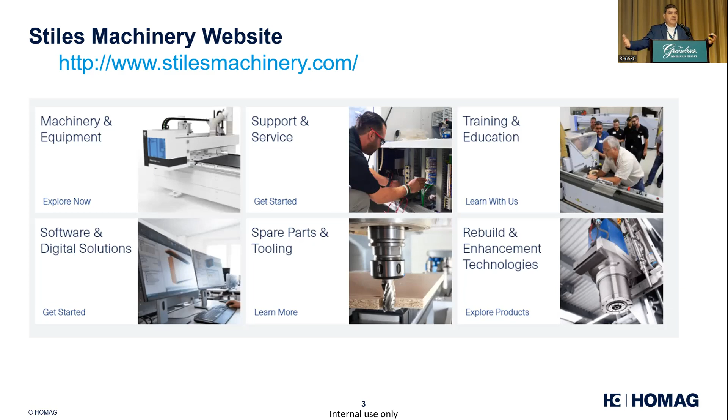As you saw, we have to have several different types of machinery to make an entire factory. We work with Microtec for lumber scanning, they've been around since 1980. And of course there's planers, sanders, CNC machines, and a HEIAN CNC machine down in the lower right that I'm introducing to the mass timber market, with very interesting features. But that's our mass timber partners.

If we're going to do an entire factory for you, we have to partner so that all the machinery in that factory is accommodated. So what I want to talk about is, what is mass timber? It's kind of a little different spin.

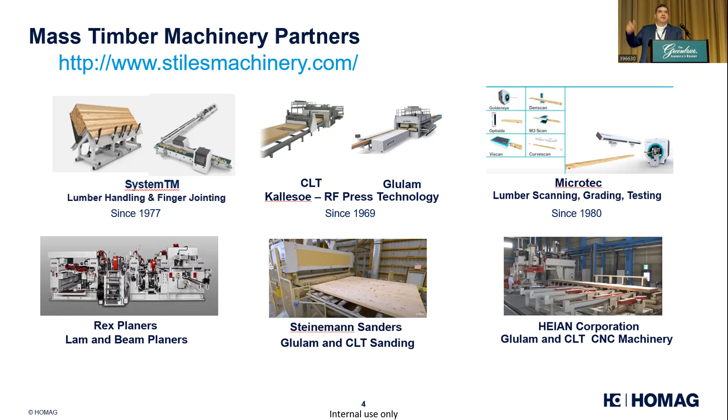So mass timber is a subcategory of heavy timber construction. You probably can imagine the stories of old barn raisings, big timbers, mortise and tenon, old world type joinery. There's actually a standard called heavy timber construction. What defines that type of construction as heavy timber is beams have to be minimum approximately 6x10s, and columns have to be minimum approximately 6x8.

Floor decks not less than 3 or 4 inches thick, depending on what type you use, and roof decks not less than 2 or 3 inches thick. So by definition that is heavy timber construction. For example, a residential home made out of 2x4s and 3/4 inch plywood, that is light frame construction.

Because of these large dimension structural members, the heavy timber, large dimension members, that means they get assigned a fire rating for the building codes. In residential, when you have 2x4s and plywood, you have to have that layer of drywall in there, or other fire resistant features of your light frame. But in heavy timber, just the mass of the timber itself gives it a fire rating. So that is heavy timber construction.

You're probably familiar with some of the other terms like timber framing, heavy timber framing—those are the old barn raising guys—and post and beam framing. Those are also subcategories under heavy timber construction. So the main question is, what is mass timber?

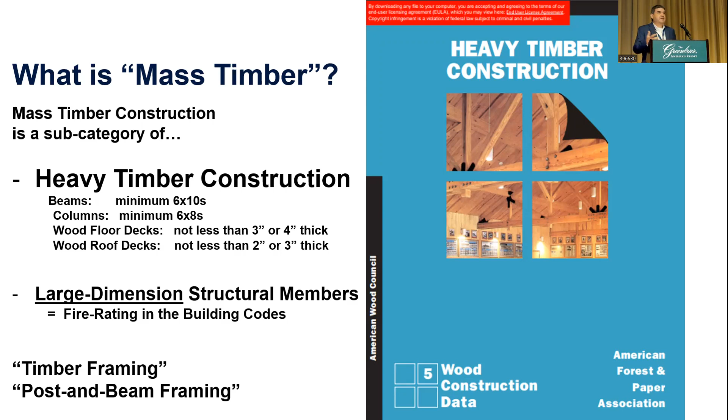Mass timber, by definition, is when you utilize these engineered wood products. There are several products considered engineered or mass timber products, but the two we're going to focus on are glue laminated timber, glue lam or GLT as it's being called nowadays, which are laminated into beams and columns, and cross laminated timber, which we've been talking about here, which are panels for floor, roof, and wall panels.

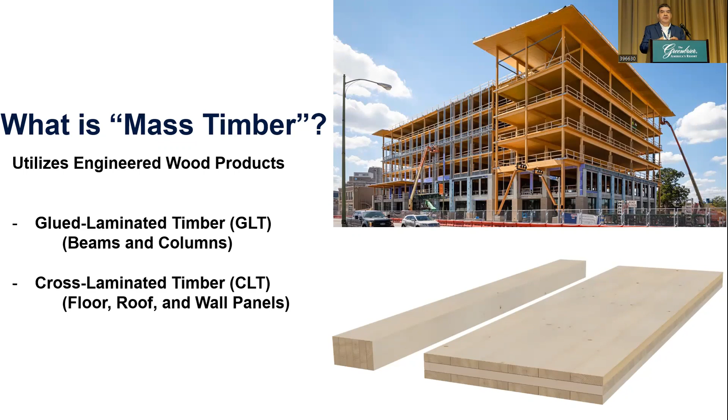You can see a 5-6 story building here. This is actually in San Antonio where I live, and it was the first multi-story mass timber building there in San Antonio. As you can see, the elements are glue lam for the beams and columns, and cross laminated timber for the panels. Here's the map you've seen before just earlier.

Now you're looking at it through a different peephole, same information, different peephole. So is the popularity growing? Jeremy just established that—yes it is. This is the projects on record.

There's 1,860 projects, and this is fresh, as of June 2023. All these dots represent that construction has started, construction has completed, or it's in design. If you look at the two arrows on the bottom right there—construction started or built—the majority of those projects involve CLT. That shows you the popularity, that CLT is really dominating this movement.

In design, I want to point out, on my slide here 444 are construction started—that's in the last 20 years approximately. And in design there is, what is it, 580 something, I can't see that far. But the point is, there's more in design right now, as of June 2023, than the total that has been constructed in the last 20 years.

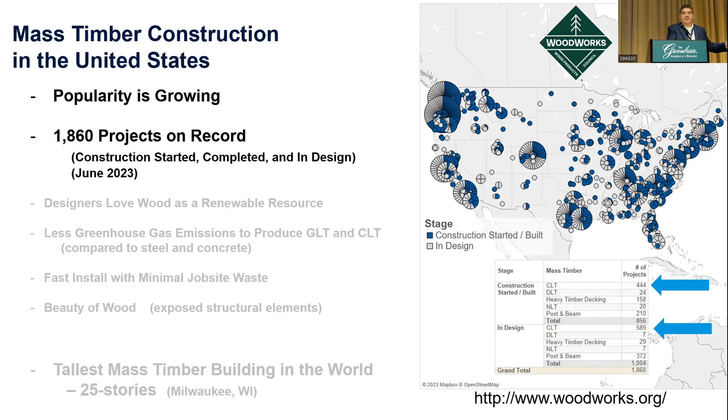Jeremy showed you the next one, the animation of all these projects that are developing. So again, here's what's been constructed.

Under that other view, the arrow points to when PRG 320 was adopted. Notice the initial first decade or so, folks were doing full engineering of buildings and getting them approved at the local level. You can see pretty much a linear line, kind of trying to gain momentum. But once that PRG 320 standard was adopted, you can see it's exponential.

And again, this is constructed. So that total there, that's 856 at the top of that exponential curve. Right now, as of June 2023, there's more projects than there were ever constructed in the past 20 years. So the point is the popularity is there, and we don't see it slowing down right now.

The way to even confirm that for the next decade is that you look at Europe, and they're still on an upward rise. Europe is at least a decade ahead of us in technology and fabrication of these projects. So if we look to Europe as a 10-year foresee of the future, we're not seeing any slowdown. And of course, Jeremy circled the Appalachian area, lots of opportunity.

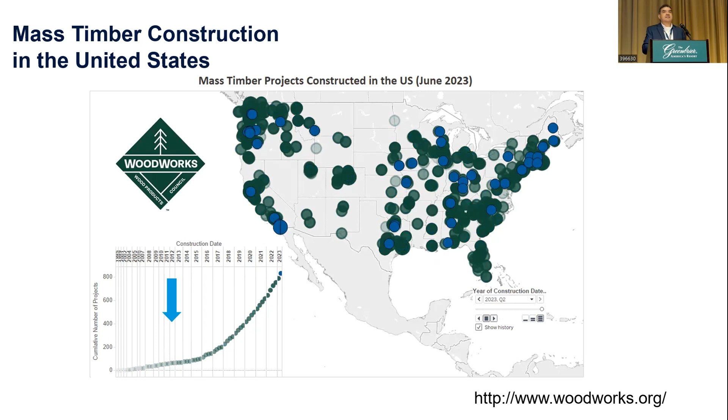Same slide, under the mass timber construction. So why is this so popular? Designers, and developers, love wood because it's a renewable resource. Every developer wants to put that LEED Platinum stamp on the front door of their building. So wood is in this green movement. There's less greenhouse gas emissions to produce glulam and CLT versus steel and concrete.

So how do we affect that map that we just saw? How do we affect that popularity to say, I want to promote hardwoods? It boils down to convincing the designers, the architects and engineers, and the developers to say, not only do I want a mass timber building, but I want to make it out of hardwood.

And the way to approach those folks is that architects are always open to listen to new products. It's called AIA presentations, and I've done that for many years, where I go and promote glulam and mass timber. By the way, my previous employer was one of the glulam manufacturers, so I was project managing projects that would involve the fabrication, delivery, and install of these projects. So you've got to hit the designers and the developers and convince them to call for hardwood glulam or hardwood CLT.

The other reason they love it is, like the guys in the upper right there, fast install and minimal job site waste. You're not going to have a pile of rubble. There's no sawing that goes on at these job sites. Everything comes pre-finished, pre-machined, and ready to fit. Steel connections go together, so everything comes ready to assemble. So minimal job site waste, and of course the beauty of wood.

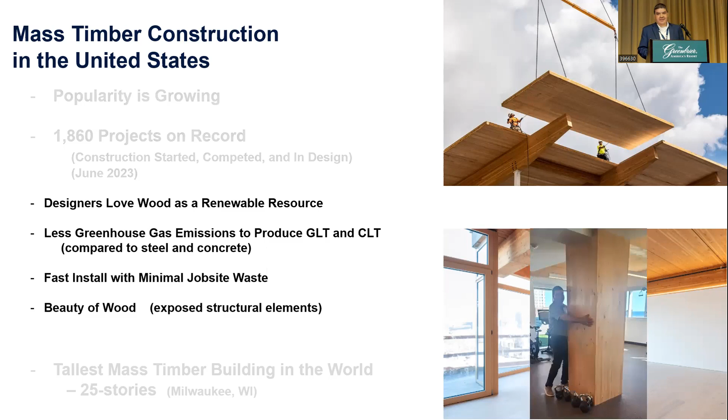So this column here was in the tallest mass timber building in the world. It's actually in Milwaukee, Wisconsin, 25 stories, and that column I was hugging there, that's the bottom floor of that building, the bottom timber floor. I asked the developer of this building what led him to use European CLT and European glulam for this, and his one and only answer was that only those two companies could supply a project of this size. So production was key in choosing the supplier of that project.

When I sit down with folks that are interested in setting up a factory, I ask them, and I show them this picture, what market are you trying to supply? Are you trying to supply projects of this size? Are you trying to supply projects of the 4 to 6 story, like the other picture I showed you? Are you looking to do just 1-story banks or large glulam natatoriums? We've got to get a definition of what is the objective of that factory before we talk about a factory.

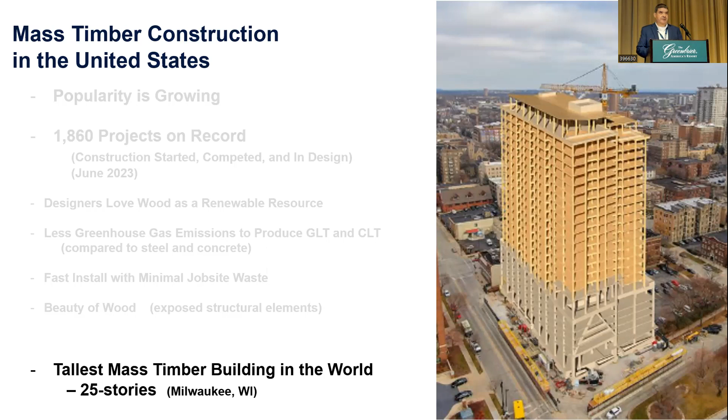So that's like at the top of the heap there, supplying volumes of that level. So let's talk a little bit about glulam and CLT manufacturing. And I found these two photos on the internet.

I think I know that the top glulam example was adhesive manufacturers, because notice that they really are highlighting the adhesives.

But in general, concept-wise, glulam - you're taking lumber, and if you're going to make beams larger than the lumber you've got, then you're finger joining them end to end to whatever length you need. Then you take those long length laminations and glue them up face to face into a beam, like what you see there. Plain concept.

Cross-laminated timber, same concept. You're still taking lumber, finger joining it end to end, but now you're laminating it 90 degrees to each other. So there's longitudinal and transverse laminations, kind of like plywood, except plywood is veneer. Here you're just laminating lumber.

A point I'll bring up later - notice that this lower CLT graphic, which I borrowed from the Sterling website, shows nice S4S same width lumber. Of course, everyone here processes random width lumber for hardwoods, right? So you see this as an opportunity, but also a challenge, is that row going across the width there - you can actually utilize random width.

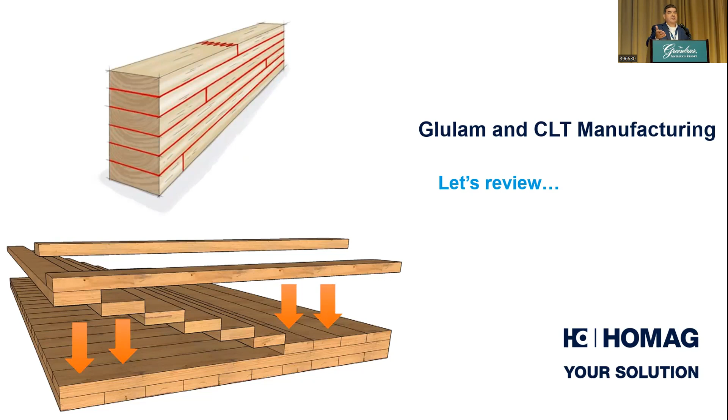There's nothing in the standards that prevents you from doing that, and you can increase your yields. You don't have to take your random width lumber and rip it to some even width and lose yield immediately. So there's actually opportunities to use random width in this product, but there's challenges to processing that - we'll talk about that.

So glulam, let's talk about glulam. And here's where I say it's part of the history. We've seen it in history, and we're repeating history. We're making history right now. So let's talk about glulam.

The main point about all this mass timber, and we're here with hardwoods, is we're actually targeting to make an engineered wood product. We're not just machining lumber to a shape - we're making an engineered wood product, and it's going to be used in a structural application, like that 25-story building we just showed. For that reason, because you're making a structural product, you have to follow a product standard. For glulam, it's the ANSI A190.1.

That's like your quality control standard - if you're going to make a structural product, you better make sure you're meeting the requirements for lumber, the grades, laminations, how they're all fabricated, the finger joining, for example. What adhesives are you going to use? They better meet all the quality control testing, and then the bond quality. So in that picture, you're going to have face bonds, edge bonds, end joints, the finger joints.

So all of that is quality control, and you're going to have to develop a quality control manual, and you're going to be inspected. There's daily quality control that you do in-house, and you're going to have inspectors coming in to make sure that you're operating not just at a required level, but also consistently throughout the year.

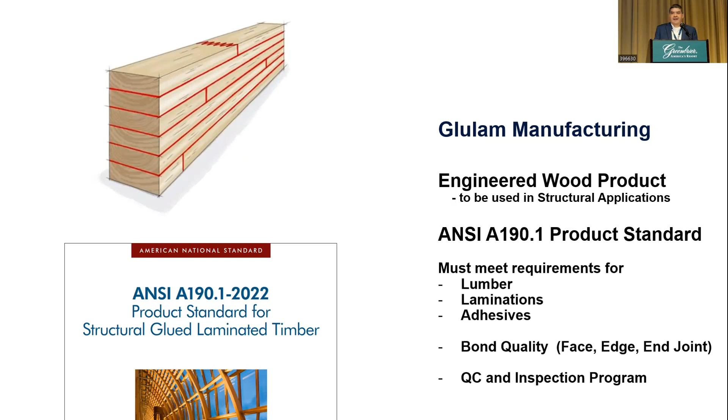That brings up another slide I share when folks come to talk to me - if you're going to become a certified manufacturer of glulam or CLT, you're going to need to meet with these certification agencies. The one I highlight is APA, the Engineered Wood Association.

I actually work there. APA is going to put you through a series of questions. What wood species do you plan to process? Hardwoods, right? What layups do you plan to produce? Well, we have to talk about what's in the standard. Who will be your lumber suppliers?

In this case, you all are the lumber suppliers. So APA wants to make sure that you're going to have a consistent supply. They don't want you always struggling to find a resource, and then your product isn't consistent. Who will be your internal lumber graders?

And here again, this is a structural product, so we're not talking about your NHLA grader - we're talking about structural grades. And then what adhesives will you use? Well, that depends on what type of process you're going to be pressing these or finger joining, and different adhesives have different performances. That's important for hardwoods here again, and many more questions.

So you see these factory layouts, and you also have to have a whole other QC lab in that factory, because you're going to have to do daily sampling of finger joints. You've got to test them in tension in-house. You're going to have kilns for processing your shear blocks to test your adhesives for strength and for durability.

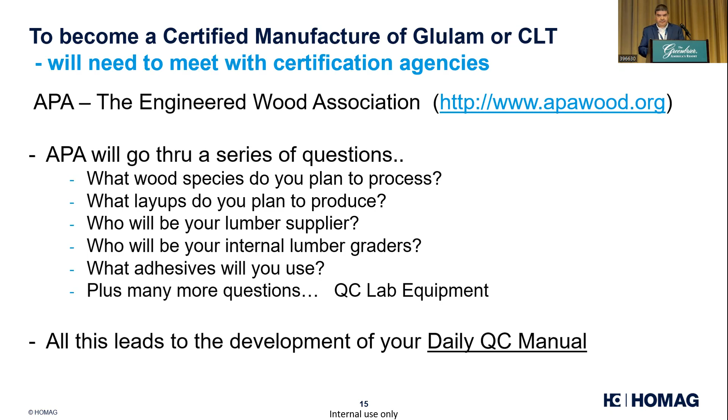I created this. So when I first started with Stiles, I said, let me make a map of all the certified manufacturers, and green was me. That's why Jeremy, we never met, because I was green for this whole first year, but I'm going to start visiting all the reds as well.

So these are all the certified manufacturers, certified meaning for structural. You showed a slide from the mass timber manual that got put out recently, and there were 18 manufacturers. I think 6 or 7 of those are like Sterling Structures - they have 2 plants, Texas CLT. They're producing crane mats. Structure Craft was on that list, they produce dowel laminated timber, so they're not on here.

This is Glulam and CLT. For the CLT group, I think there's only 11 manufacturers that are making CLT. Others are making CLT but aren't certified for commercial, like the building that you showed - they're not even certified, just making crane mats, for example. So this is the map I produced just to give you an idea.

And we've talked about regions, right? Appalachia is right there. If you're going to want to convince one of these manufacturers to receive your material, they got to go through those series of questions, even though they're already certified. If they want to introduce a new species, they're going to have to go through all that series of questions and certification. So it's a hurdle to bring a hardwood in, even to an existing plant.

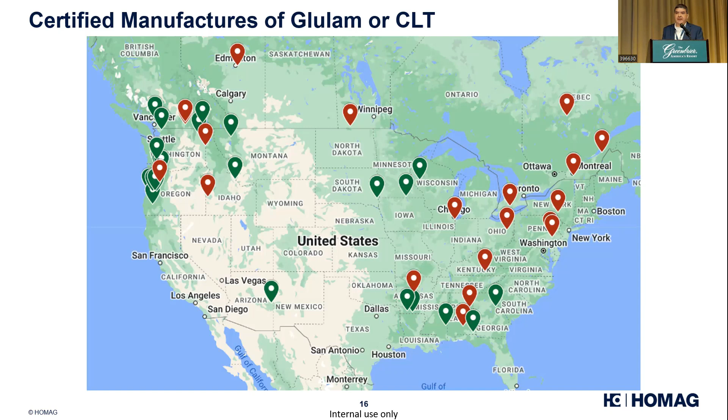Okay, so you have that QC standard - that's just saying how do you operate your factory. But then you need to know, well, what am I going to lay up?

And so if you have like a 20 lam beam, that's the bottom 1 lam. If you have a 21 lam beam, 5% is more, so you're going to have to have 2 tension lams on a 21 lam beam and higher. But anyway, it's the recipe, and the way I like to say it is, if you follow the recipe as a certified factory, you're then going to be able to assign a design value.

So this 24F V3 is called a 24F because it's got a design bending strength of 2,400 PSI and 1.8 million PSI of design bending stiffness. Those 2 numbers and more design values are what the engineers jump in and use so that they can design beams for their large building design, so that they can size those glue lams. So follow the recipe at the factory, you produce a product, and there's design values associated with it. That's how this is all set up in mass timber.

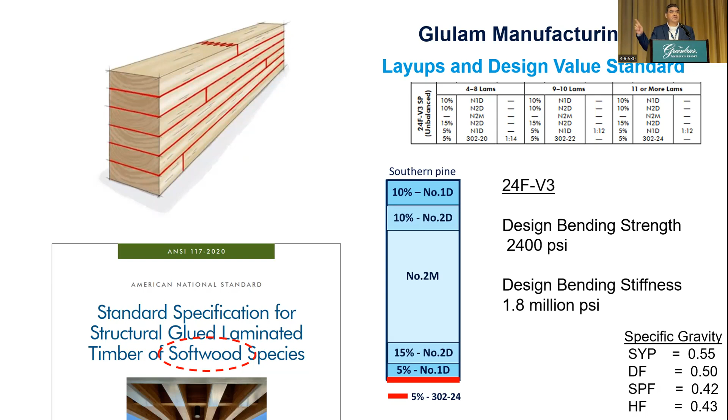0.55 to 0.43. Oh, and by the way, that 25-story building that I showed you that was made with European spruce has a specific gravity of 0.37. So that 17 stories of mass timber was made with a wood in Europe that has lower specific gravity than what we have here in the US. I think it's 0.37, so you can write that down.

So hardwoods, what about hardwood glulam? Here's where we start getting into some history. Back before this 1996 version, by the American Institute of Timber Construction, there are hardwood glulam layups in the standards. It's not by APA, it's by AITC.

The way they set it up is they call it by groups, group A, B, C, D, and there's a lot of species within each group. So group A, and I pick on red oak for a reason, I'll show you why. Red oak is a 0.62 specific gravity, so much higher than southern pine.

Other species in group A include ash and hickory. Group B has red maple, I'm picking on that one for a reason, 0.54, textbook specific gravity. That's right at about the same as southern pine, a little higher than Douglas fir. And then yellow poplar.

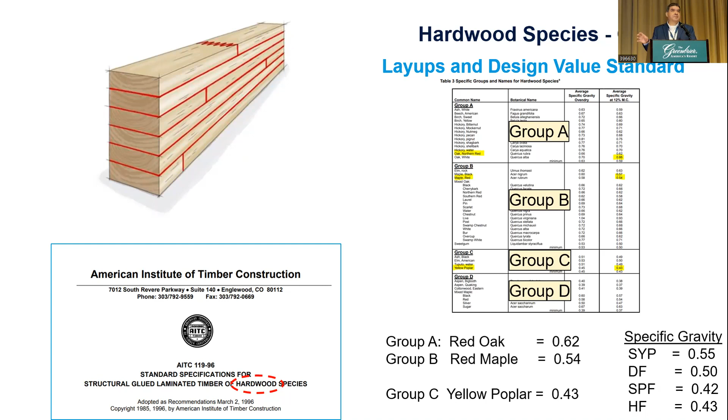Everything we've been talking about is yellow poplar here. That's a group C species in hardwoods, and it's a 0.43, again a textbook value, about the same ballpark as spruce pine fir and hem fir. We're going to latch onto that information - group C yellow poplar is at about the same level as spruce pine fir and hem fir. There's a lot of CLT being produced today made out of hem fir and spruce pine fir.

So there's a good starting point there. The strongest visually graded yellow poplar in that 1996 standard - which is actually still today's standard, but that old - is a 14F V1. Remember southern pine was 24F. This is the strongest available for visual grading: 25% select structural on the bottom, 25% number one, and number two in the middle, and it still needs that even higher grade tension lam. Even though you used all this great high quality and expensive material, you can only assign it a 14F and a 1.3 million. That southern pine was 2,400 and 1.8.

And again, these are structural joist and plank grades. So do you think this is going to fly? You're using up expensive FAS grade material to make a structural product that can't even compete with southern pine. So that's how the standard was.

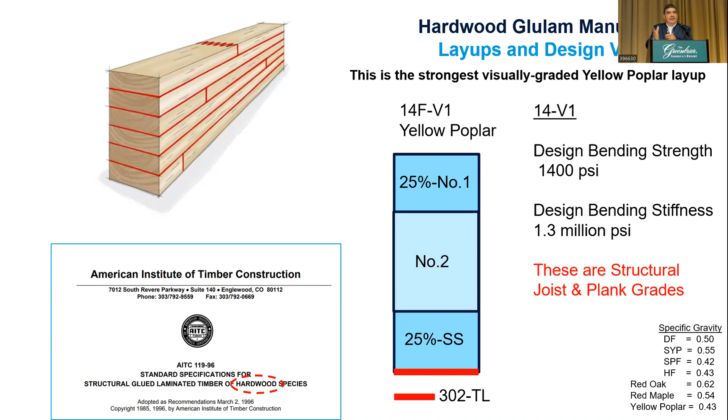Back in the mid-90s - by the way, I also worked at the Forest Service, and by the way, I am on the PRG 320 committee, Tom, so I was on that email list that just came out while we were talking. In the 90s, when I worked with the Forest Service, we said this hardwood glulam standard is very conservative. Let's make up some layups. These are some of my reports here: efficient utilization of red maple, yellow poplar glulam performance.

We said let's go make hardwood glulam layups made from mechanically graded lumber, so you don't have to use select structural, you don't have to use number one. Let's take material, run it through a mechanical test program, come up with some grades, and see where we are. We actually had a target. I picked red oak, red maple, and yellow poplar because that's what we studied. In a different life, I was one of the researchers doing that - kind of what's happening today, right?

So in the mid-90s, I'm going to refer back to that picture on the left - that picture is worth 1,000 words. One of the things we wanted to do is, it doesn't make sense to cut up your FAS material and propose a glulam made from high grade, because that's higher valued in another industry, in hardwood and furniture making. The objective of that study was to say, let's use that center cant after all the high grade material has been processed out, and see if we can make an E-rated grade.

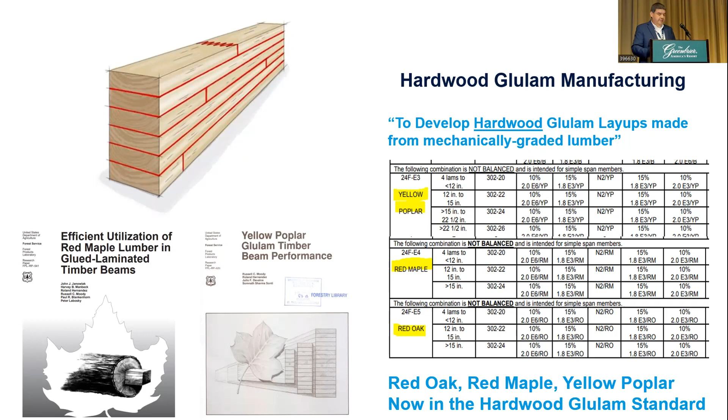So that picture is worth 1,000 words. The feather for a researcher's cap was that those three line items are now in the standard to this day - 1996. Yellow poplar, red maple, red oak, group A, B, C. And this is what it looks like.

Again, the other feather for the cap is that we came up with a layup that targets 2,400 PSI and 1.8, just like a southern pine. If you look at percentage increases, that's like 72% stronger than what was available before with visually graded, and 38% stronger than that 1.3 layup that was all visually graded.

So again, it's in the standards. But are you seeing that, this is from 1996, in use today? I think back then there was more focus on technical feasibility—a lot of the research going on is always about technical feasibility. And you all here in the audience are interested in the economic feasibility, right? How do you use your material? So that's still a hurdle that needs to be overcome.

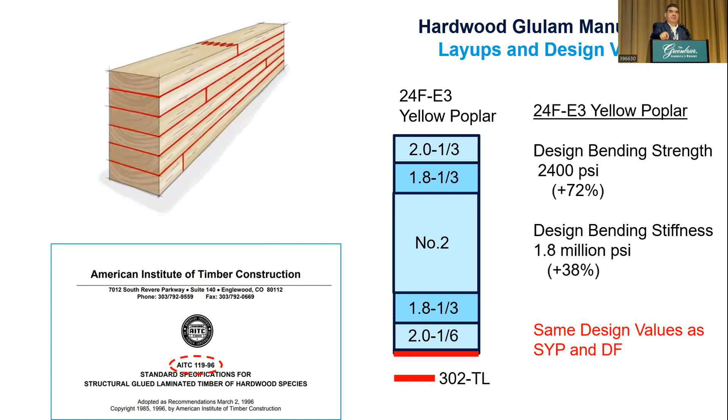We don't want to repeat history and see this 20, actually 30 years from now. In 30 years we don't want to see CLT in the standards, but nobody's using it. So we've got to do something to not repeat history, and say that we're going to use hardwoods in CLT. I'll show you how there are advantages for CLT as opposed to glulam.

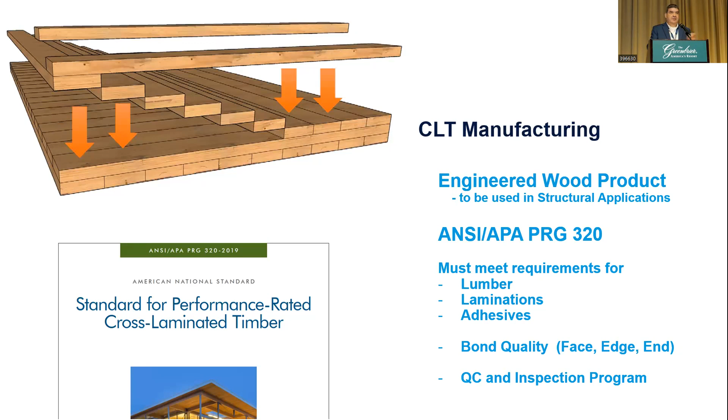I'm not going to go into that long spiel like I did for glulam covering history, but CLT follows exactly the same parallel. It's an engineered wood product used in a structural application, and everything's the same as far as requirements for quality control and bond quality. The inspection program has to be certified by APA, but it's now the ANSI APA PRG 320 standard—that's the standard for CLT, like the other one was for glulam.

In that standard there's an Annex A—that's like the recipe page, it's not a different standard, it's a recipe page. If you look at, I think it's the V2 layup, that's number one spruce pine fir on the longitudinal layers and number three spruce pine fir on the transverse. That's the recipe. If you use number one and number two spruce pine fir, you're assigned a design value.

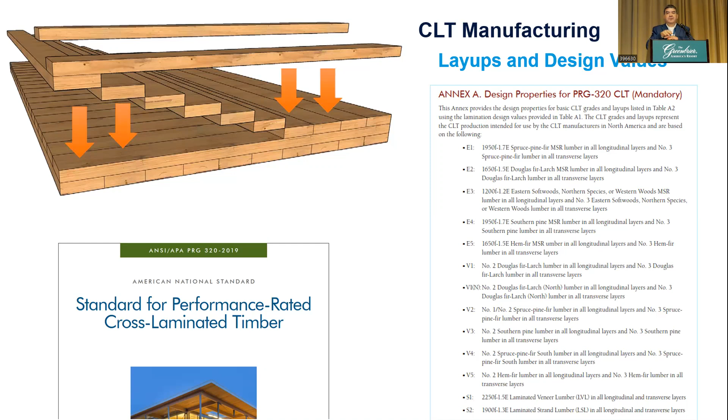As of right now, there was literally an email that came through during the first talk today: the PRG 320 is going to be adopted. There's still voting to go, but that layup is going to be called VH1—H is for hardwoods, and it's yellow poplar. The other hardwoods aren't in there yet, but yellow poplar will likely be in there after the voting. I think the target date is late 2023, though the printed version might say 2024, but that's happening right now.

Does that sound familiar? All this research going on to get hardwoods in the standard for CLT—27 years ago we were doing exactly the same thing to get hardwood glulam into the standard. So let's learn a little bit from history.

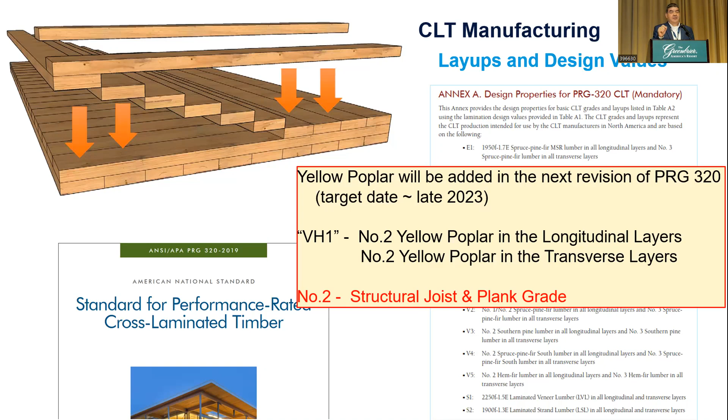The VH1 layup is actually kind of nice because it's easy: number two grade every which way—number two longitudinal, number two transverse. And again, this is number two structural joist and plank, not the common appearance grade. So there's going to need to be some regrading going on here, and we're going to talk about that.

I pause here with this picture—imagine you're producing random width lumber, and everyone is. To make that glulam on top, you're going to need to do some width sorting, and if you have a target glulam width, you'll have yield loss because you need to trim some boards. You'll have to plane that final beam, and that yield loss already puts you at a disadvantage just to make it—and we haven't even talked about pricing yet.

In CLT, all those nice equal-width boards going across can actually be random width. So you will need to S4S them, but you can utilize multiple different widths across that layer and across the length to fill up that volume. I think there's a small advantage here to try to overcome some of that cost difference by using the full width of random width lumber—just a tidbit I wanted to pause on.

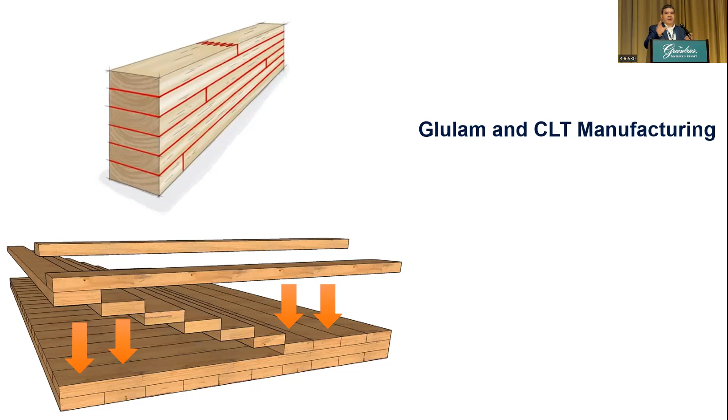Machinery-wise, we're actually in discussions about designing a machine for that, so don't ask me today, ask me later. So let's go through how it's made, and I really want to relate it to what you need to know as it relates to hardwoods. Let's make some hardwood CLT.

This is a hypothetical sit-down on how we're going to use yellow poplar to make yellow poplar CLT. The PRG 320 has adopted this new layup called the VH1. That means we need to lay up number two grade yellow poplar—specifically number two grade structural joist and plank.

So you as the suppliers, you want to utilize number two common appearance grade, maybe you can utilize your number three common. That's a question, right? So what does that mean? You're going to need to regrade cost effectively.

I'm not talking about your NHLA grader that is grading your appearance grades. Now we got to get him to rerun everything he just graded and see what falls into number two grade structural.

I want to show you some cost effective ways we'll need to process. We want to process out what is true number two structural out of that material we're supplying, and then maybe we know there's going to be reject that does not make number two structural. How can we upgrade that, and all those reject sections, maybe we can reintroduce it.

That layer that you saw building in the transverse layer of a CLT, there's a lot of leeway in those cross layers to use lower grade or reprocessed materials. So that's where CLT is an advantage, and maybe that's why history shows that the glulam was not easily adopted.

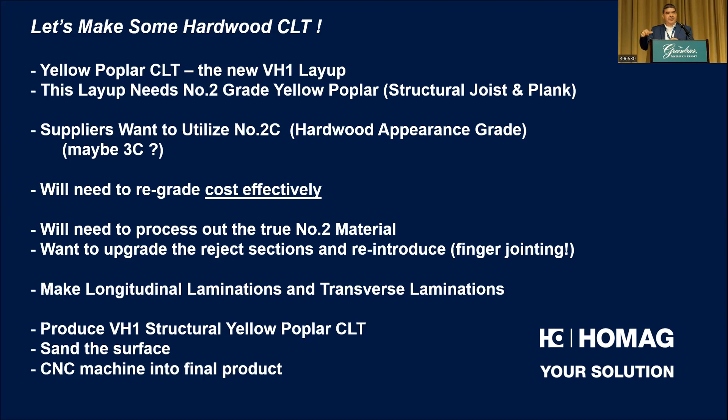So next line is we're going to make longitudinal lams and transverse lams, and then we're going to produce the CLT. You got to press it, then we got to sand it, and we want to get it out to the job site. So we got to do CNC with the final product and get all the details so that it gets installed out in the field.

So let's go through a factory here. We call this a compact factory, and this factory is on the HOMAG website. So we call it a compact CLT factory. I'm going to show on the lower right some of the different features along that whole line. So you've got your lumber infeed, obviously.

System TM produces what they call their OptiFeed series. You can go as simple as a tilt hoist to bring in your material - notice I put a square around the bundles of lumber and a forklift feeding it. Or you can get it even more advanced, with what's called the OptiFeed 6000 VAC. We'll have a video later.

So basically you're pulling off whole rows of lumber and you can feed it into the system at 32 boards a minute. So actually a very high speed line that can just be the infeed.

Next, we use MiCROTEC here to do lumber scanning. Before you run a board through your finger joiner, if you have a warped board that's twisted and crooked and bowed, that's going to just jam up your finger joiner, and then you're spending hundreds of dollars a minute to try to get that unjammed and your production stopped.

So what MiCROTEC does is they have what's called a CurvScan. They map out the curve or the warp on a board, and if there's something out of tolerance, they send the software signal to a crosscut that I'll show you in a bit, and it chops it up. So say that's warped, bad for laminating - let's process it down, get it into a shape and form that we can refinger join, or completely reject it. So that's CurvScan, this whole area I have boxed there.

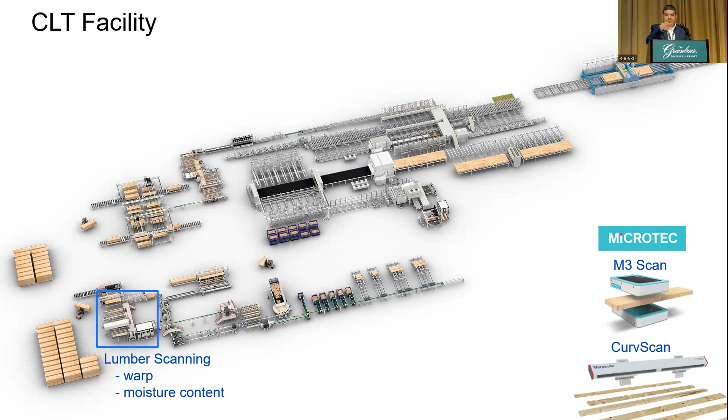Then it gets sent through a GoldenEye - so lumber scanning, X-ray knots. You're X-raying, and imagine your NHLA guy that's grading - I go like this because I know they walk on the boards and walk down the line, they flip the boards, and you know he's looking at knots as well. Well, this machine is looking at knots.

It does it at several hundred feet per minute, and it's not only taking an X-ray of every single knot, but you have a program that runs this. And if your program says I'm just sorting number 3 grade lumber, well guess what - that board is just going to zip right through and nothing's going to happen to it.

But if you want to say I want to sort out FAS - for example, we're still talking appearance - I want to sort out FAS, so every board that has 6 foot minimum, is that still the grade for FAS clears? The program will say okay, if there's a 6 foot board, send the software and send it to the chop saw to cut out every clear out of there, because that has a higher value. But for structural, we just need number 2 for our yellow poplar, CLT grade.

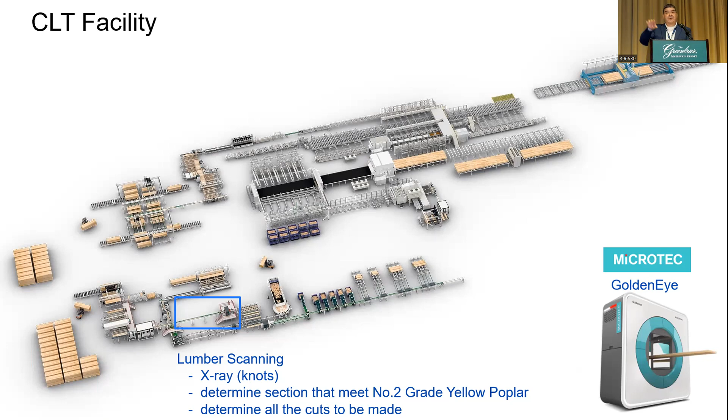So if it meets number 2 at a certain length, chop it and send it to the number 2 grade. If it's reject, let's go do something about that. So that's what this all can do. It's not just the scanning of it, but it's the software that controls every machine down the line.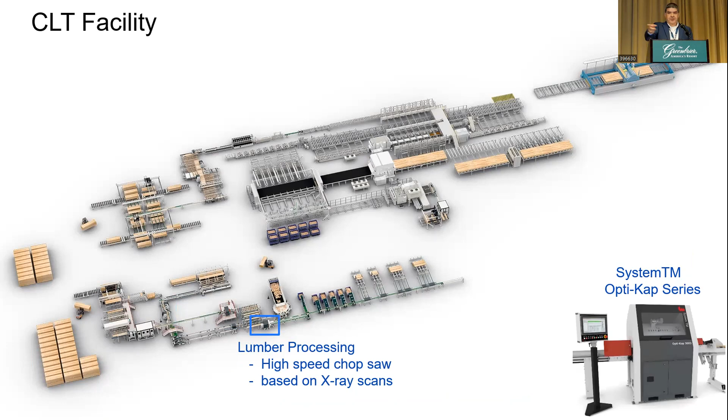All right, so now you got lumber processing. Here's the System TM Opti-Kap series. I had to look it up, but they run at about 400 plus feet per minute. And it's not just, when it runs through, notice all those chops to the right there. So it's chopping at 400 feet a minute, and it's chopping little clears, the full length 6, and all that information it gets from that knot map. It's doing a smart cut and all those different sorts.

So in this case, you see about 9 sorts and maybe a reject run. So that's what this system does: run it through the golden eye, Opti-Kap, chop it, and you've got all your sorts that you're ready to send to higher value furniture hardwood, or send back through the line for the low grade transverse, or move it to the longitudinal grade. So that's key, those 2 last steps there.

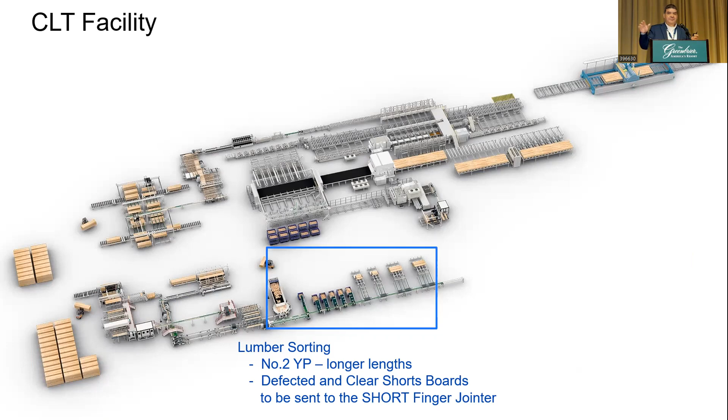So now you have it all processed. Let's take our reject and send it right back down that line, and take it to the short board finger joiner. So suppose there's pieces that were too warped as an 8-footer or 10-footer, we chop it down to clears, and we have what's called the System TM Opti-Joint H-200. So that's a short board finger joiner, and you'll see it in the video.

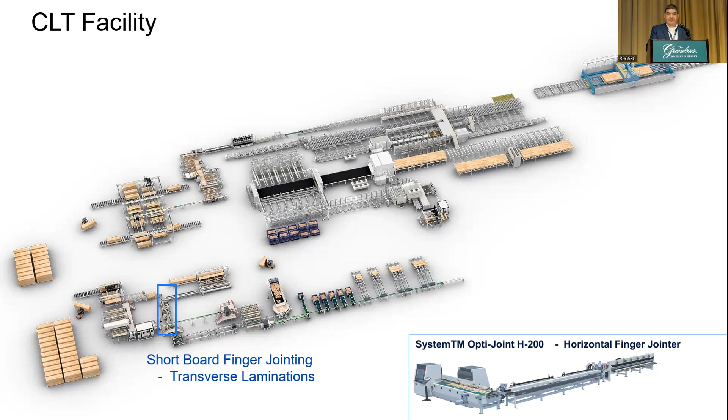So we can't zoom in here, but taking boards that are short, finger join them with a horizontal joint, and that's going to make - what we're doing here is making the 10-foot wide or 12-foot wide CLT transverse lamps. So we're just finger jointing shorts, making only for the transverse. Here's finger jointed boards that had just been finger jointed, made from short boards. They're going to be hidden in that CLT layer.

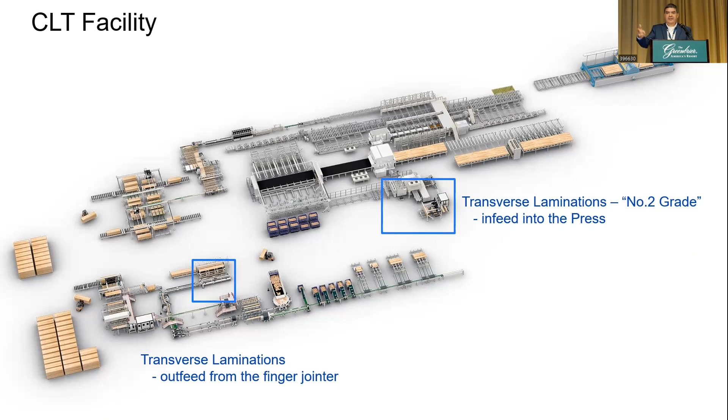That's the outfeed on the left. We're going to take those and take them to the infeed over on the right, and that's going to be the infeed for your CLT. So while that's happening, all those higher grade or long boards that got sorted out, we're going to send them to the long board finger joiner. And so in there, the infeed for that is the Opti-Feed 6000 Vack.

So here we're only doing 1 grade, number 2, but suppose you had multiple grades like that glue lamb I showed you that had 4 different grades. Here you can be picking off from 4 different packs and saying, I got to send 5% number 1 dense, 10% number 2 dense, 50% number 2 medium. And imagine the log jam if you had a human having to do all that. Well, here you got a machine that's just pulling exactly like that recipe.

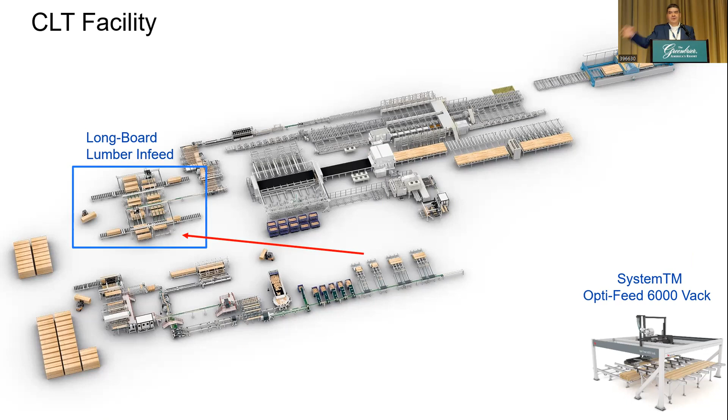So now I'm circling back and using some of the terms you just learned. We're grabbing the recipe and feeding it into the finger joiner. And we're going to have all the material that we need to make up the beam, or in this case, to make up the CLT.

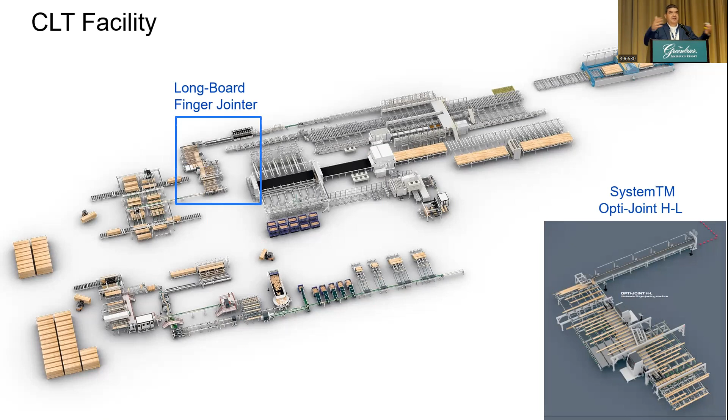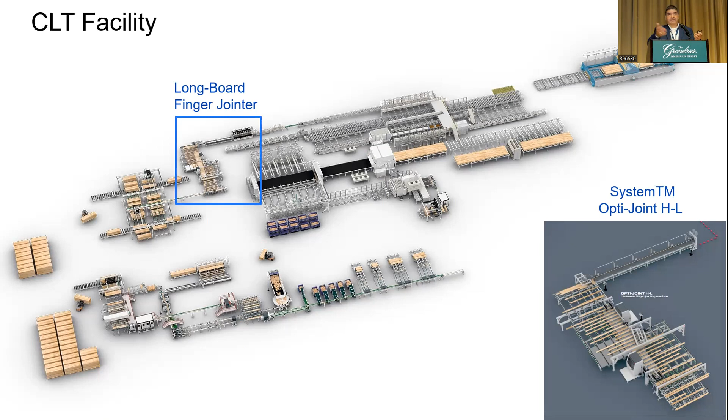System TM also makes a long board finger joiner. So here you're taking long board. Suppose that board you ran through is perfect number 2 grade structural as a 10-footer - well, that never got chopped, it just gets sent to the long board finger joiner. These long board finger joiners can handle from 6 to 20-foot lumber. So it goes through, and now you have your long lambs. So if you're making 40, 60-foot glue lamb or CLT, you're making the 40 or 60-foot lambs.

Here's the assembly area, and we're only talking CLT here. So here's where Kallesoe Machinery comes in. Not only do they do the radio frequency presses or the radio frequency tunnels for the finger joiners, but they also do the system solutions - where are you going to stack your long lambs and where are you going to stack your transverse lambs? So they design all the in-feed and out-feed of these presses.

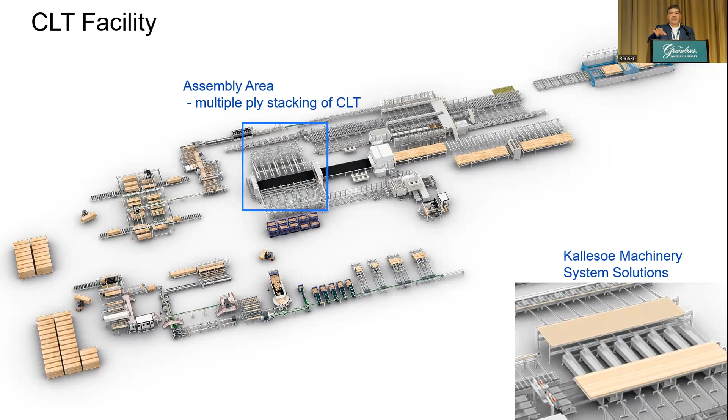And then you got the press. So here is a radio frequency CLT press. They make glulam presses, and they make CLT presses. They also make a combi press, which will make a glulam and a CLT in the same machine. The limitation is that glulam is limited to about a 1.2 meter, which is roughly 50 inches or so.

So your CLT is limited to that. Most folks being architects, engineers, designers, they're designing here in the US with 8, 10, and 12-foot CLT. So that machine doesn't work if you're going to want to make 8, 10, or 12-foot wide CLT.

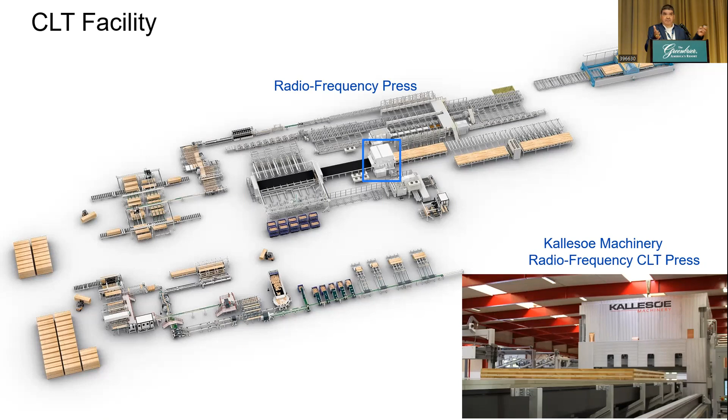But it's a combi press. If somebody wants to get introductory into this CLT business, you can make a slightly wider than a 4-foot CLT, but you can make a standard size glulam. So that's presses. You made a press, you sand this.

If your architectural intent is like those buildings we saw, then you want to sand it with a sander. This is one of our partners. If you're going to make crane mats, you can skip this step. You don't even have to get that piece of machinery if you're going to be making crane mats.

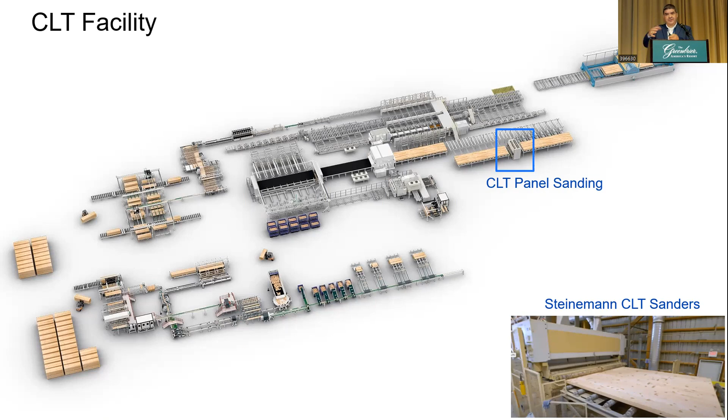After you have a finished product, as far as sanding, you still got to process edges and maybe cut out window and door cutouts. And that's when you get to the CLT panel.

We've partnered since 1987 with a company named HEIAN CNC. They make a tremendous machine—look at the size of the guy standing next to it. They make a CNC that has the width capacity of a CLT panel, but it has the complexity of end cuts for beams. You see there's like a ring thing looking there.

So a very significant feature that can be used both for beams and CLT, all in one. Other manufacturers will make a beam CNC and offer that, and then a CLT CNC separately. The beam CNC can't do the width of a CLT CNC, and the CLT CNC can't do the details of a beam CNC. This one is combined, so we're really excited about this product.

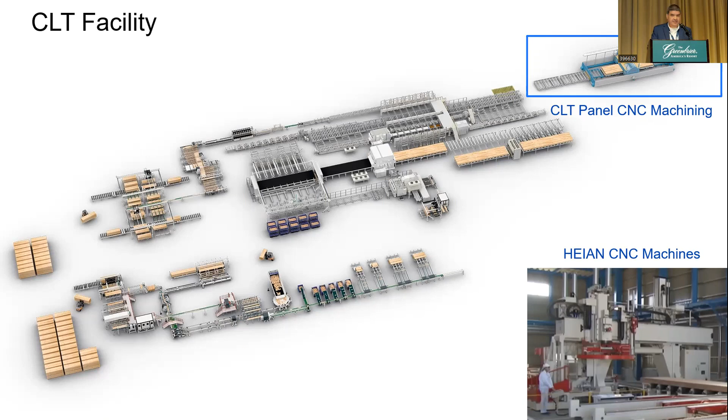That looked like a real nice drawing. That's actually a real factory. We're going to go see a video here, and I'm going to talk to it because everything I just showed you, you're going to see it now, and you've pictured it in a drawing. Let's look at that. I'm saying my thank yous here because I'm going to exit this PowerPoint show, and then we're going to run the video.

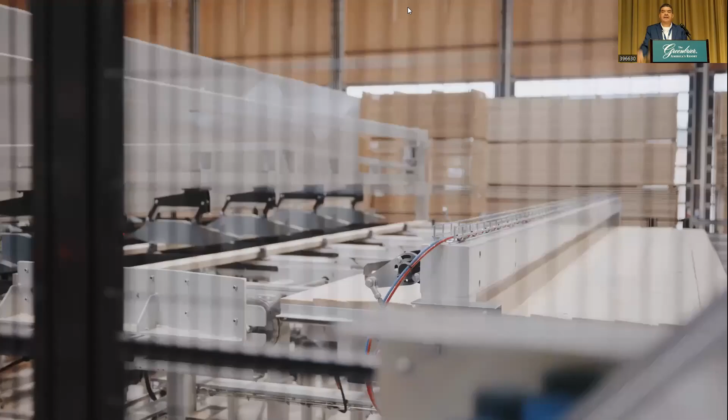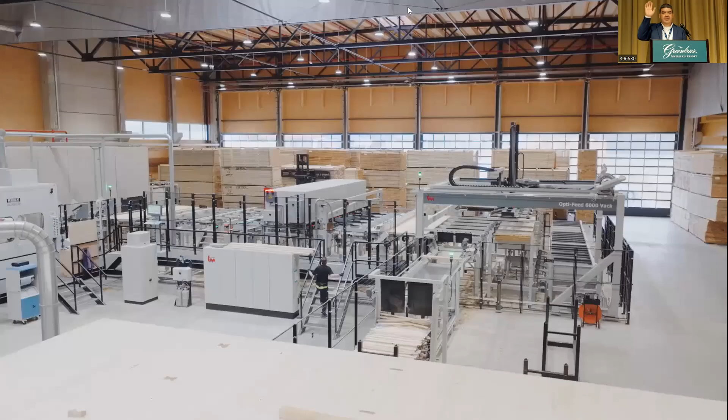Here is the OptiCut. You're going to go through and notice here's where it's 400 feet per minute. You're going to see an upper. Here's a GoldenEye scanning all the knots, all software driven. So here's the OptiCut—notice the board coming in on the right, and it's getting cut up. And then all those sorts, I think it was 9 sorts in the drawing.

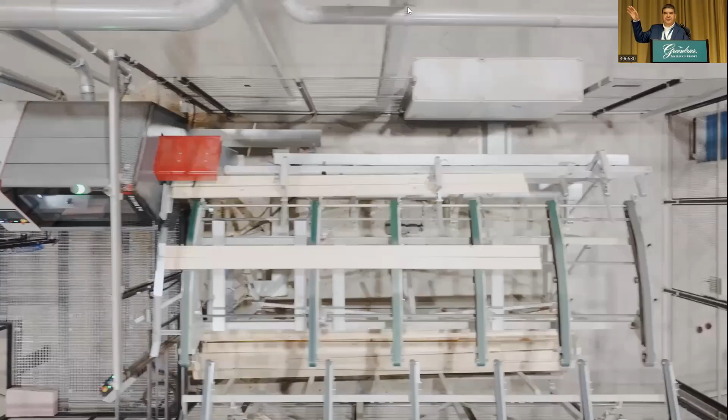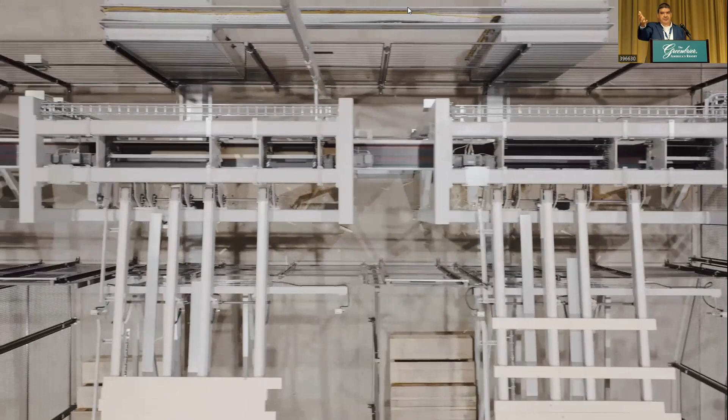That's them right here. So imagine the 2 common hard yellow poplar being processed into number 2 structural—imagine all your sorts. Those were your longs. You're going to have short rejects. So suppose these are the rejects, like they don't make number 2 common. They get chopped up into clears and sent right back to the short board finger joiner.

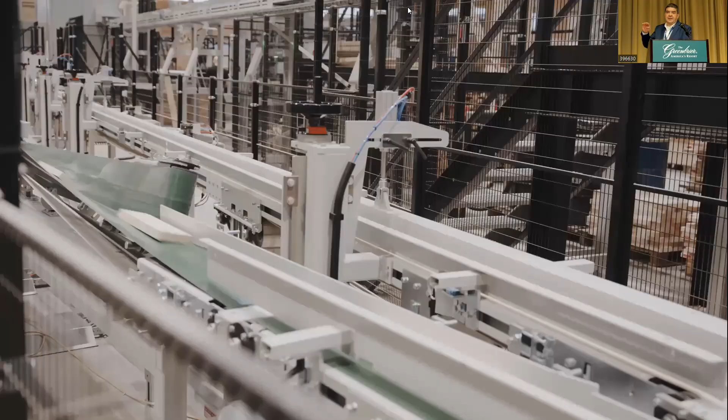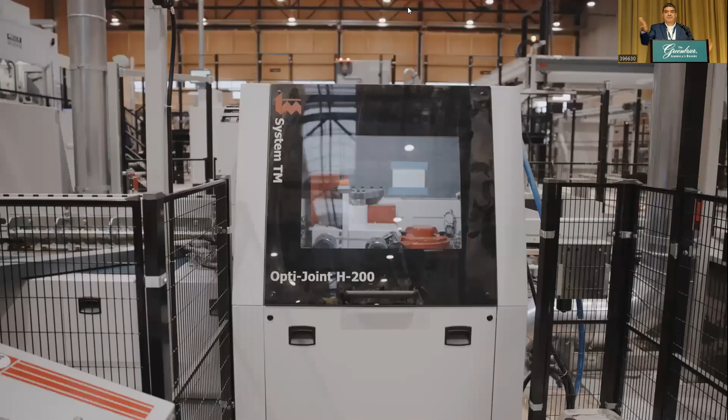Here's a short board finger joiner. This is a horizontal joint where the finger joint's shown on the edge of the lumber. All these are going to be re-finger jointed back into—that was the Opti-Joint H-200 short board. They're going to be made into 10 footers or 12 footers, but the transverse layers. At this stage, we recommend radio frequency curing.

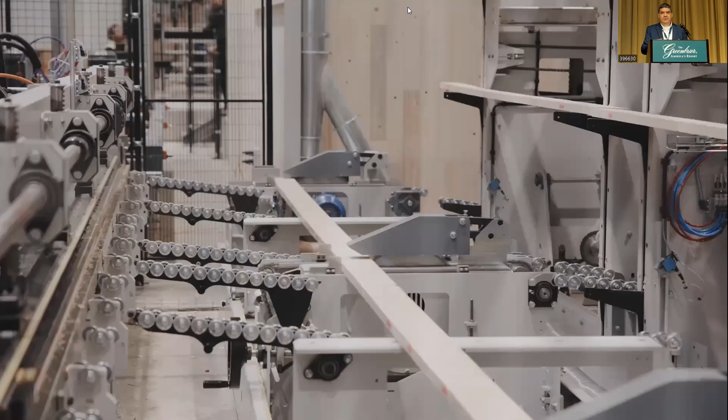If you radio frequency cure, the strength of that joint is about 75 to 80% of its strength immediately coming out of the machine. If you don't use radio frequency, then you're relying on time for that joint to cure. And there's a lot of handling going on here in a factory that could potentially stress that joint.

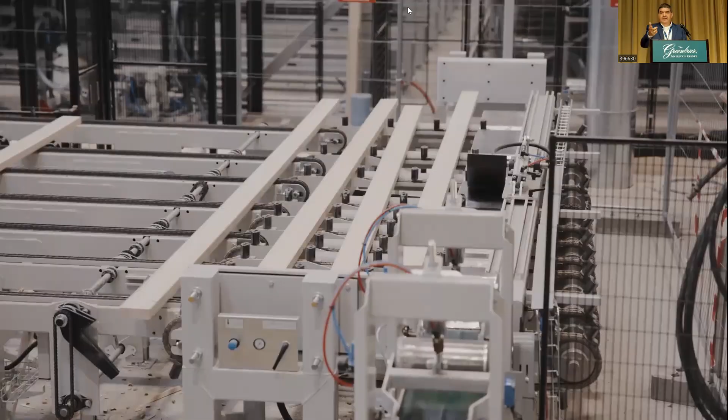So now we're up to the long finger joiner. There's the crowder. That board there is going off to the other end of the factory. And at that point, notice all that movement. That should be radio frequency cured.

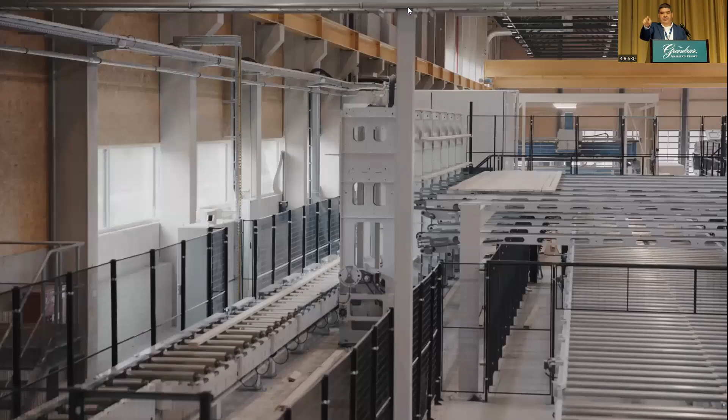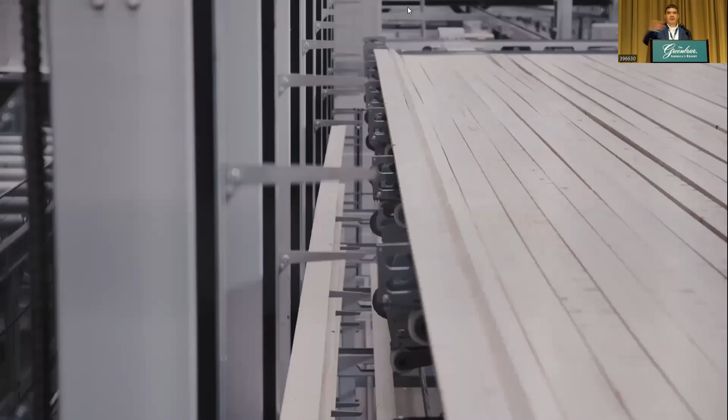These are the long lams that are going into a layup area. And then the Kallesoe system solution is that you take your long lams and bring in your transverse lams and start laying them up. So here comes the long lams. Remember, they have to bring in those 8, 10, or 12 foot wide transverse lams from that other area.

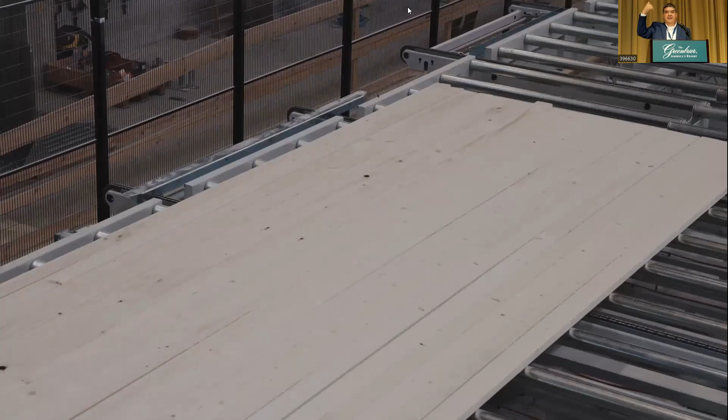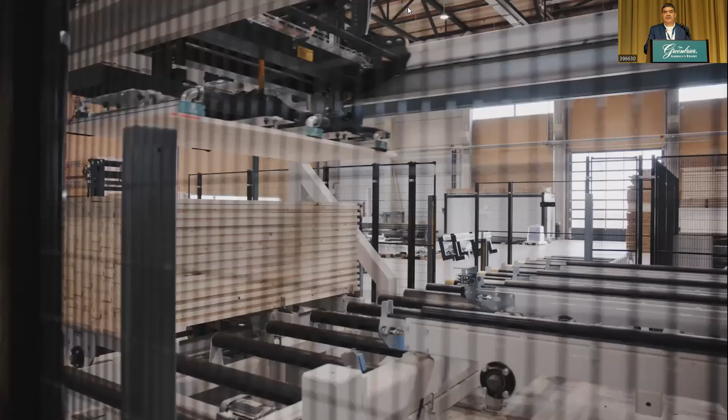So they bring them around, and this is a glue application. Oest is one of the suppliers of that. So here's the transverse lams being brought in. This is all in that kind of same area, assembly area I showed earlier. They are being S4S'd because that layer, all those boards should have good contact between the edges.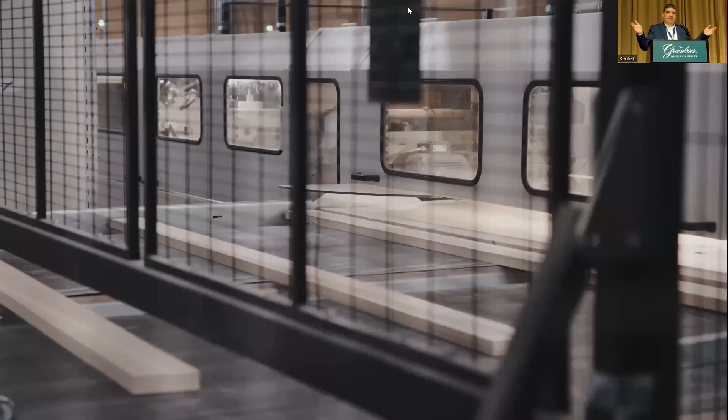And here's where you're doing the edge glue application. So again, these are the transverse layers coming in. So if you're making 10 or 12 foot wide CLT, that machine there is handling 10 or 12 foot wide boards. So it's only for the transverse layer. Edge gluing going on here.

And all of this is going to reach, you're going to see a little radio frequency cure here a bit with the light going on. I think this is not a full cure. It's just to take it from here to the assembly area.

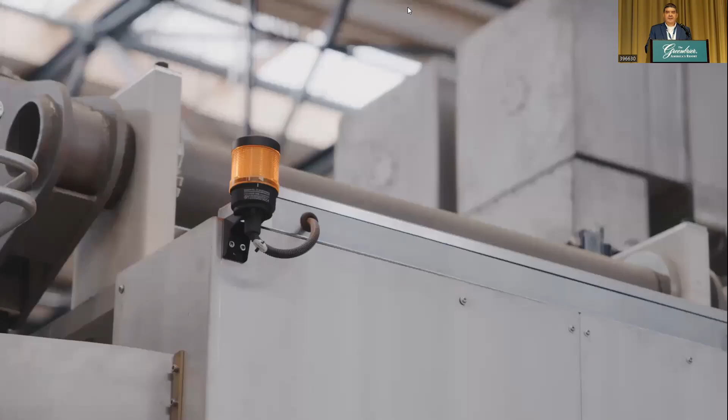So now you got to assemble the long layers. You got to do the transverse layer. That's a whole system there. And then getting it ready to go into the press. There it goes into the press.

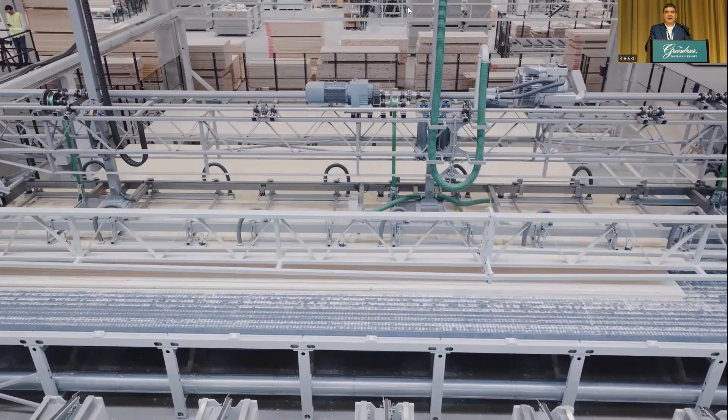Notice, look at the left edge that's going to get pressed, and you're going to see the squeezing. Look at the left edge. Right there, boom, it gets squeezed.

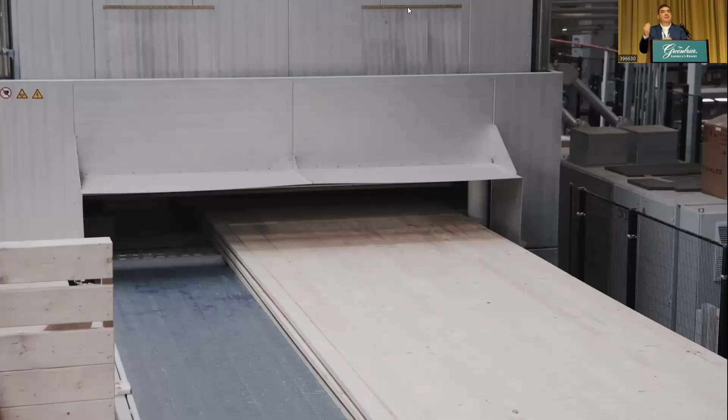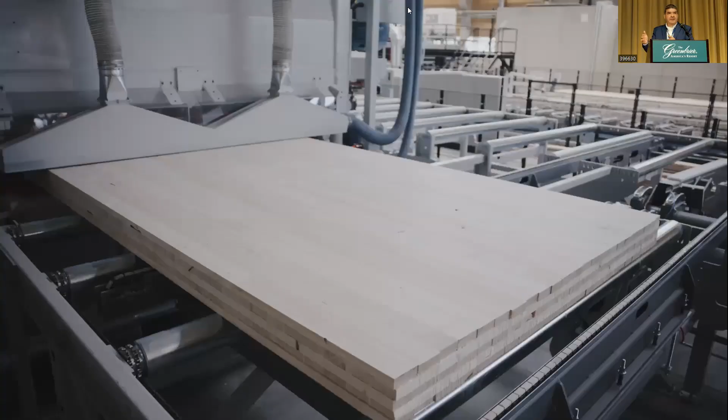And then these presses that are radio frequency, those are only pressing 20 feet at a time. So it's a continuous press. So if you're making 40 foot CLT, you do 20 feet, you move it down, you do 40 feet. If you're making 120 foot CLT, nobody's doing that. You do that 6 times.

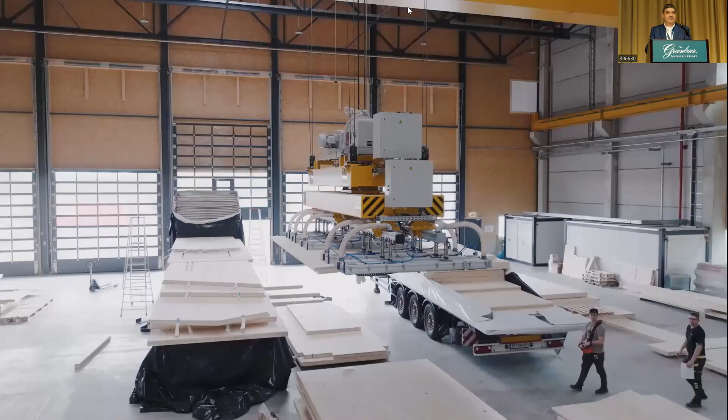So you theoretically can go out the door and enter the parking lot, but of course trucking is the limitation, right? But the continuous press is the same size, whether you want to make 20 foot panels, 10 foot panels, or 60 foot panels. It's the same press, you're just cycling.

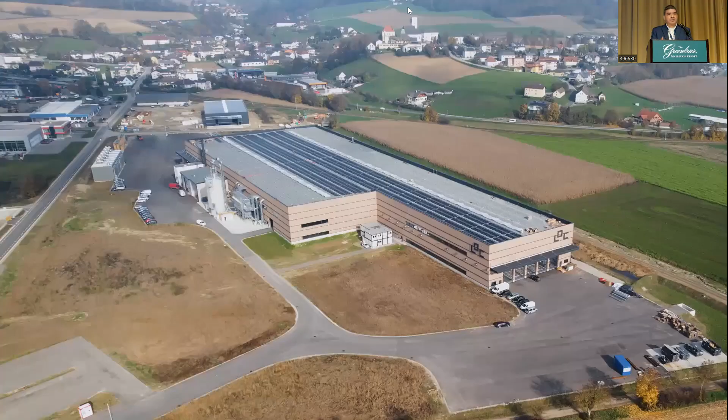And because of that radio frequency curing during that 20 feet, that means there's certain adhesives you have to use. MUF is one that's used. You can also radio frequency cure PRF, which is like the gold standard for adhesives as far as what's been used for many decades. So I hope you saw through the system there.

I hope you had a real clear image of it, because sometimes you see these videos and you're just looking at a peephole and wondering what's going on here in front of me. But talking through it after just seeing that drawing, I hope that really let you follow along.

Actually, that's it. So that's the video I wanted to show. I hope you learned. I don't have my four topics there, but I hope you learned a little more about what mass timber is. I hope I built upon what you presented, Jeremy.

And then as far as what it takes, there's going to be certification hurdles, and we're here to do that. I mean, like I said, I work for APA. I work for the Forest Service. Those studies I did, I was actually on the committees that was voting on the Wood Innovation Grant types of projects. So I've been like Johnny Cash, I've been around. And so anyway, if there's any questions you have regarding machinery, mass timber certification, and I get, like my title says, vertical market, anything and everything to do about mass timber, that's what I'm here for.

Yes, Silas. There's some questions asked earlier that I hope you re-ask, because I had some thoughts on that.

Thank you so much for the wonderful presentation. My question is, when I visit the CLT mills across the US, one of the problems is with the tolerance of that lumber. Some suppliers give you 1 extra inch, some half an extra inch, some give you 2 inches extra, and that's true for hardwood as well. So how does your machinery adjust or address those issues, because most finger joints are set up for a very fixed length, let's say 8 feet, 10 feet, 12 feet?